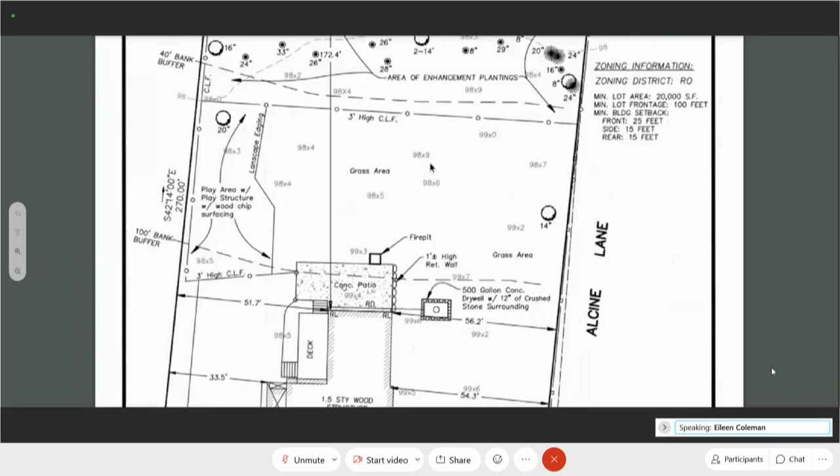Okay, do any of the commissioners have comments? Please identify yourself. All right, I have a couple of comments. One, I thought your project came out very well, sir, Mr. LaPont.

I'd like to express the appreciation of the commission for dealing with an issue that started with unapproved cutting of trees, and you worked with us very diligently and cooperatively. So I'd just like to thank you for that.

The last point I'd like to ask you, I don't believe this was in the order, but you have the old fence in back along the stream, and at some point that's convenient for you, I'd like to make a request, it's certainly not in the order or anything in the official papers, it's literally just a request. Would you be willing to remove the fence? The reason is that the area adjacent to the stream works cooperatively with the wildlife, and it would work better as a wildlife habitat if there wasn't a fence.

Yeah, we talked about that yesterday. I have no problem removing that. That would be fantastic, we appreciate that as well.

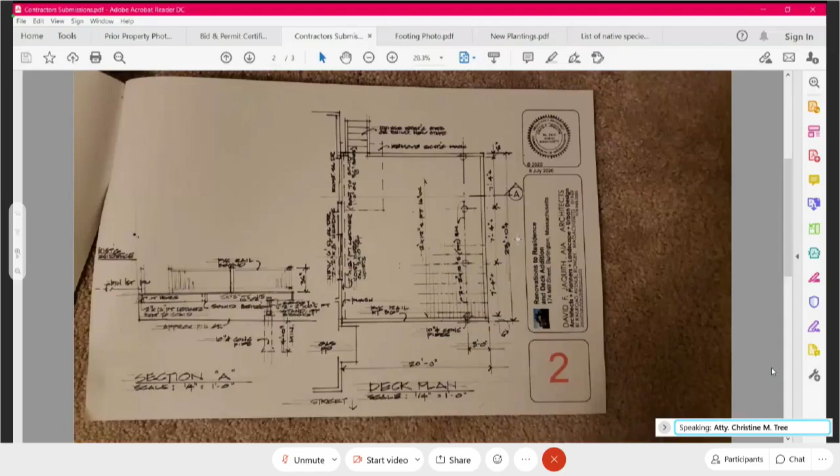After Ms. Coleman gave permission, he then submitted further plans to the building department, which asked for permission to build a 16 by 20 deck. You can see that on this plan, the dimensions here and here, and on this quality drawing he submitted. In fact, he was originally asked by the owners to build what I believe was a 14 by 20 deck, reported he got permission for the 16 by 20 deck, and ended up apparently building a 16 by 25 deck.

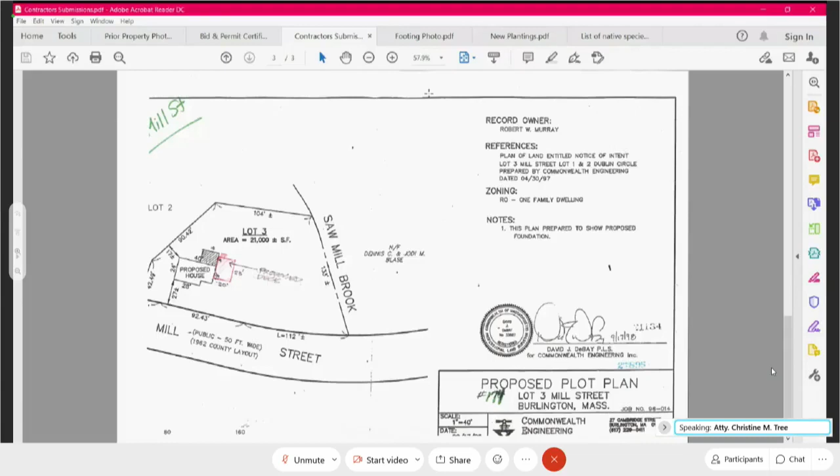This is a visual of the current state. As you can see, the extension of the full 16 comprises a lot of cantilevered territory on the deck, but the footings are, I think, riding over the line, and it gets worse as you get back to the rear of the property.

The Munns are at this point suffering a substantial number of problems from this contractor, the latest of which have culminated, as you've seen, in a police report. They have had to hire a new contractor. They were lucky enough to obtain the services of PAMCO, a Burlington-based contractor company, to help finish the project.

At this point we've seen that the markers are moved. Certainly they need to be replaced. The Munns are very happy to do that under the conditions that the Conservation Commission sets. We would ask that the deck not be required to be moved.

Among the other many expenses going on for the Munns, this would be another one, and the soil would suffer a lot of disturbance. The environment would suffer a lot of disturbance by the removal of those pilings at this point, particularly where the deck and the gravel around it are not an impervious structure.

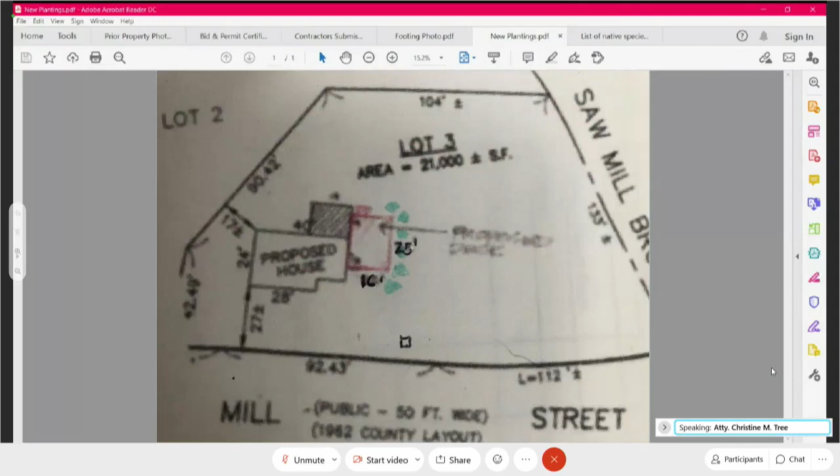As a measure of ameliorating the damage done by those pilings, the Munns would propose that some native shrubs be planted surrounding the deck—this is a little blurry, but in approximately a 25-foot line on the right-hand side, with another one here and here. This was submitted late, but this is a list, with some investigation, of some of those native shrubs. If any of these are particularly valuable to the Conservation Commission or deemed not appropriate, we'd appreciate the input.

I very much appreciate the Commission's consideration and appreciate any feedback that you have. I think that's everything.

Before we go back to the commission, I wasn't clear in explaining what the resource areas were. It's not just buffer zone to wetland—it's in the riverfront area as well.

Right, okay. And as an attorney, your last name is Tree? Is that it? It is. And just so the commission knows, I am Mrs. Munn's sister—I'm trying to help her out a little bit here. I do board work out in Western Mass before boards and municipal work, so I appreciate your listening to me. I know you don't have any idea who I am, so that's not an issue. I just was noting the irony of an attorney with the last name of Tree presenting to the Conservation Commission, which is great—I think that's fantastic.

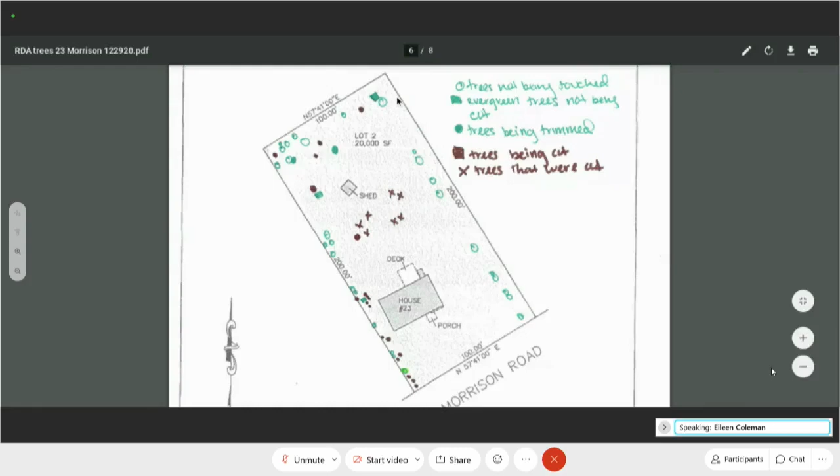I don't know if you can actually see my cursor that I'm waving around. So I think I'll stop there and pass it over to the commissioners.

Okay, Eileen, do you have a recommendation on certain trees that perhaps should not be removed, or do you want to see where the conversation goes? I think I want to see where the conversation goes with respect to the rest of the trees being removed.

We did draft a determination, and we are proposing that they do some replanting within 20 feet of the stream in compensation for the trees that either are cut or will be cut. And they should also move some piles of gravel that they've left right on the stream bank that need to be removed. All right, so that's your recommendation at the moment. Yeah, okay.

All right, Dawn, anything on this one? We had a look yesterday, willing to work with the folks, and I think that what they're asking sounds reasonable. All right, Gail.

So this is along riverfront. So we have regulations about no disturbance in riverfront, and it's important to maintain the vegetation in riverfront to help in terms of filtering runoff and also shading the stream, controlling temperature, and for lots of other reasons, maintaining the bank and reducing erosion. So it would have been nice if before any work was done the commission actually would have gone out there so that we could have identified which trees were appropriate to cut.

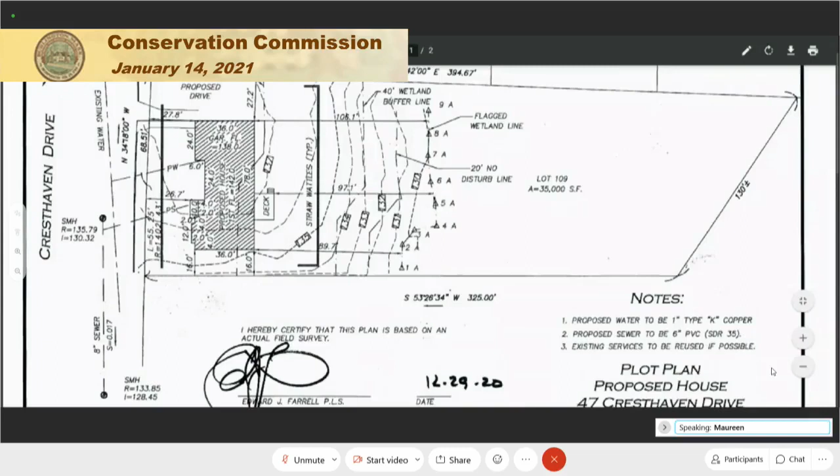Thank you, Eileen. I spoke to Eileen today, and there were concerns about some of the wetland flags. Unfortunately I wasn't able to get out to the site, but my boss, Steve Erickson, went out and reviewed the line. He thought some of these flags were torn down and found some remnants of blue ribbon. It's at the base of the slope, and he rehung some new flags out there so everyone's aware that that is a resource area and it's flagged. I can open it up to the commission for any questions.

All right, okay, thank you for your comments. Larry or Eileen, do you have comments to offer the commission?

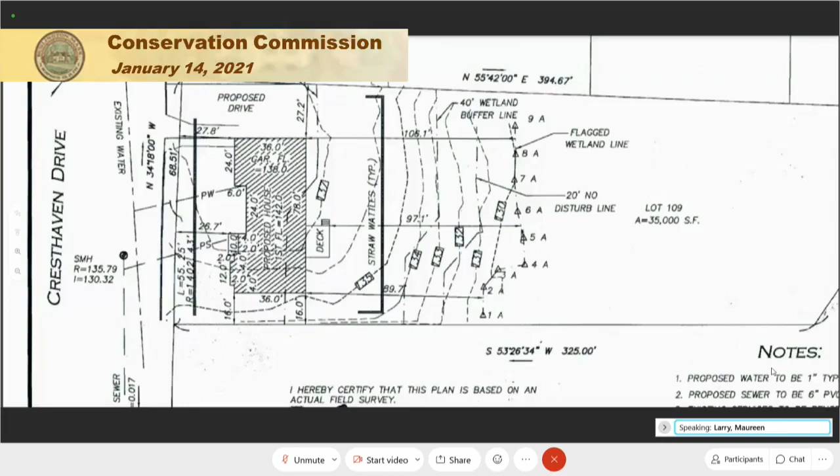Sorry, I was still muted. I was just going to say, when we were out with the commissioners yesterday, we did indeed see the flags along the wetland line. As Maureen said, it looked like either some were missing or moved. Steve definitely put some more out today, which I think are maybe along here. We could see there was a pool right in front of the wetland flags. Either way, the wetland line is at least 80 feet from where Rakesh is proposing to build a house, although there's bound to be some earthwork involved with getting the foundation in. There is a stream way back at the end of the property, I believe, but it's a very, very long property, so it's at least 300 feet away.

So the only pertinent resource area is the buffer zone to wetland, and I don't have any issues with this house going in as proposed.

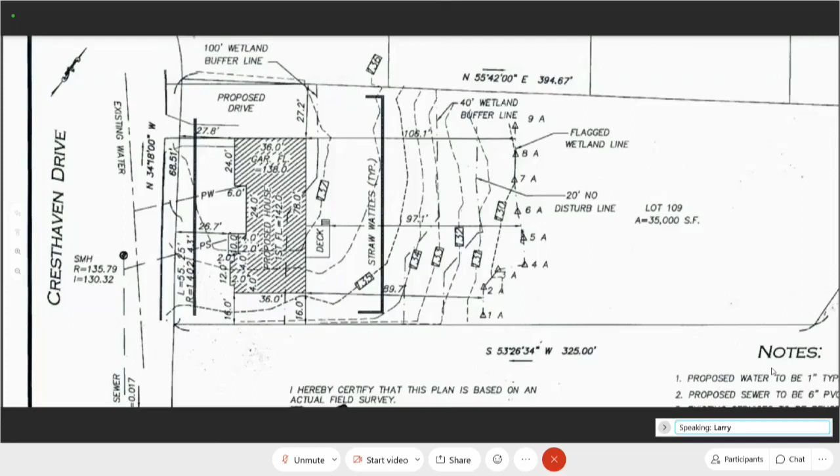Eileen, for the commission's benefit, in order to approve this project, do we need to find the wetland line, or can the project be approved without agreeing to the exact wetland line? We can approve it without agreeing to the exact wetland line. I think that's the way we've worked. All right, so it's easier, that way it becomes a non-issue.

Right, we got the exact placement of the flags. Is that okay with you, with the folks from the project? Yes, that works. Okay, all right.

Okay, so let's see if we have any further comment. Dawn, anything further? Nothing further. Gail, anything? No, I'm all set.

Bill? I think we should discuss having a fence along the 20-foot no disturb after the end of the project. Okay, all right.

Welcome to... comment on that. Okay. All right, Jennifer.

I would agree with Bill, but nothing else to add beyond that.

Ed? Just a small maintenance problem on the right-hand side, where the pool is. That right side of the pool got a lot of small debris. You should remove that so the actual pool will be its full size. Yeah, we can remove the debris.

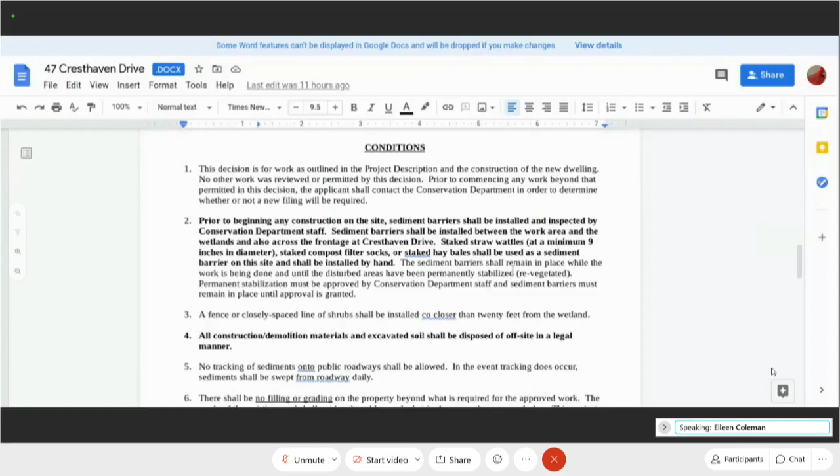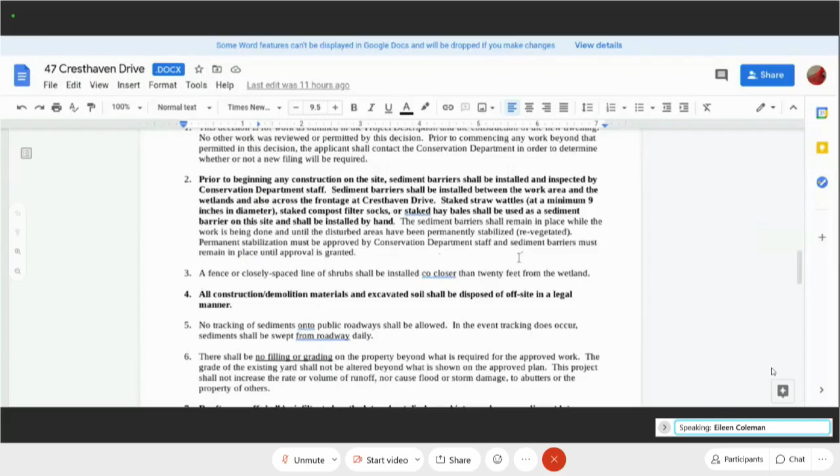Prior to beginning any construction on site, sediment barriers shall be installed and inspected by conservation staff between the work area and the wetlands and across the frontage at Cresthaven Drive. We reserve the right to require additional erosion controls should that be deemed necessary.

A fence or closely spaced line of shrubs shall be installed, no closer than 20 feet from the wetland. All construction or demolition materials and excavated soil should be disposed of off-site in a legal manner. No tracking of sediments onto the public roadway shall be allowed, and any sediment that is tracked must be swept daily.

There should be no filling or grading on the property beyond what is required for the approved work. The grade of the existing yard shall not be altered beyond what is shown in the approved plan and shall not increase the rate or volume of runoff, nor cause flood damage to the property of others.

Rooftop runoff shall be infiltrated on the lot and not discharged into the roadway or adjacent lots. Method of infiltration shall be approved by the Conservation Department. Dry wells or infiltrators shall be appropriately sized with supporting calculations.

If the driveway is to be replaced, the new driveway shall be pitched so that runoff from the driveway shall be directed to a stone infiltration trench or a trench drainage system or a grass swale, not to the street. Pesticides and herbicides shall not be used within 100 feet of the wetland.

Members of the Commission and their designated representatives have the right to enter upon and inspect the premises. Non-compliance with these conditions shall be deemed a violation of the Wetlands Protection Act and Burlington Bylaw Article 14. And the last condition is about what is required for a full occupancy permit.

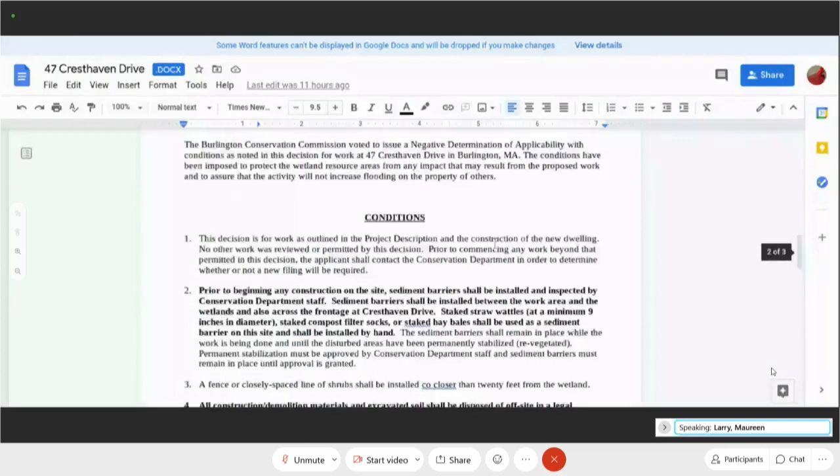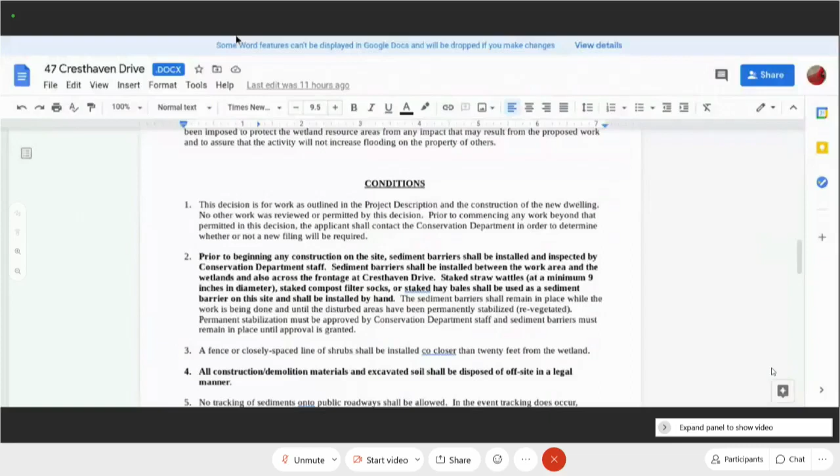Are there any questions? Do you folks from the project have any questions? You can always ask after the fact too. No. Okay, these are pretty standard conditions anyway. All right, so do the commissioners have any changes? Nope. No.

Hearing none, could I have a motion to issue a negative conditional determination for the project proposed at 47 Cresthaven Drive under Burlington Bylaw Article 14 and the State Wetlands Protection Act? So moved, this is Jennifer. Second, Ed. Dawn, how do you vote? Yes. Gail? Yes. Bill? Yes. Jennifer? Yes. Ed? Yes. Chair votes yes. The project, the request for determination passes by a vote of 6-0-0.

Great, all right. Thank folks, good luck with your project. Thank you. Thank you very much.

You're welcome. Next we have a public hearing, item number 7.

Notice is hereby given that the commission will hold a virtual public hearing during which time we'll take information related to a notice of intent. This has been filed by the town of Burlington, DPW. It is the construction of a sidewalk at Terrace Hall Ave. The proposed work would be within the bordering land subject to flooding, riverfront area, and the 100-foot buffer zone to bordering vegetative wetlands. It's being heard under the State Wetlands Protection Act and Burlington Bylaw Article 14. The commission will be reviewing this information and thereafter may issue an order of conditions for the proposed activities. This application can be viewed online by going to the commission webpage, or you can ask questions by submitting to conservation@burlington.org.

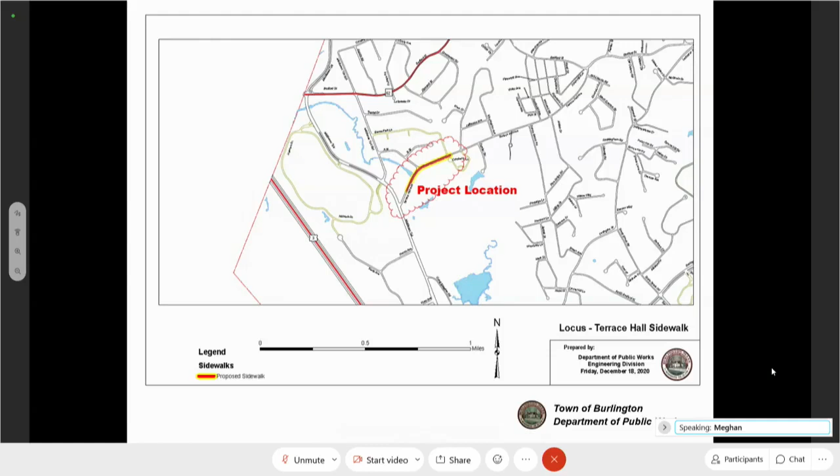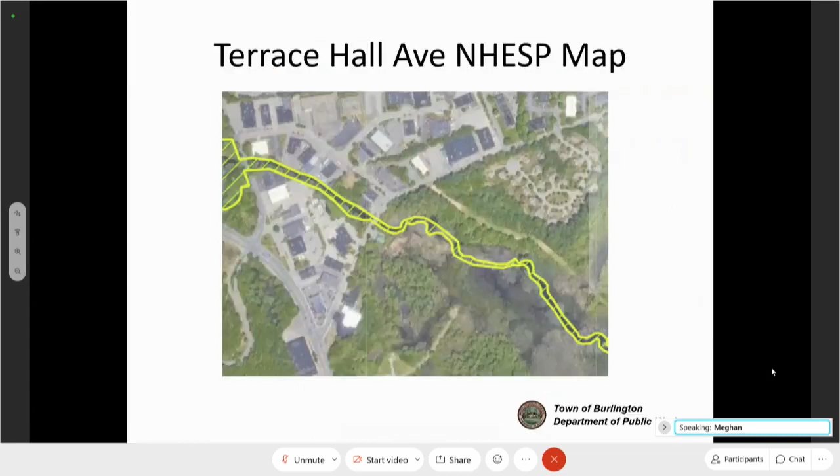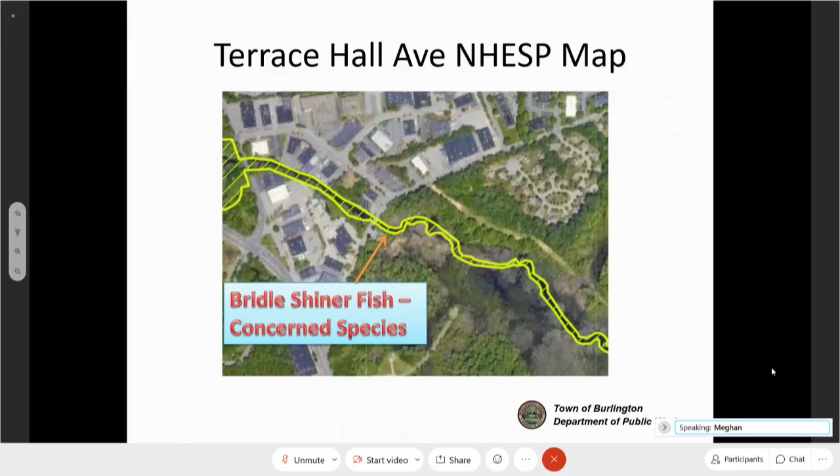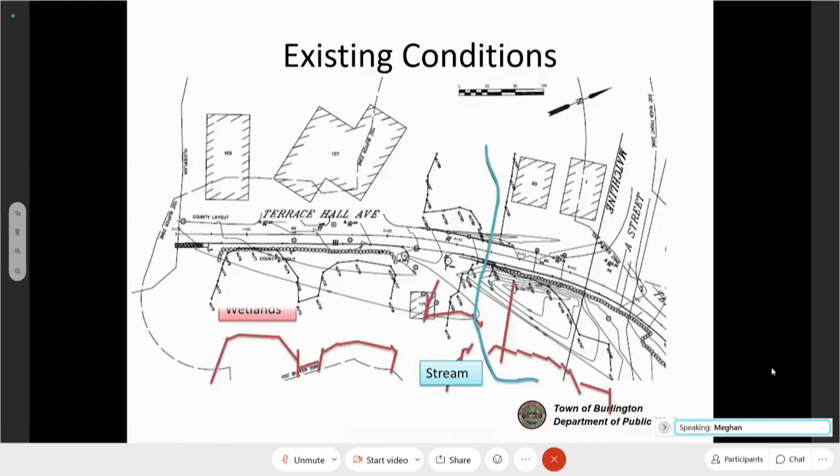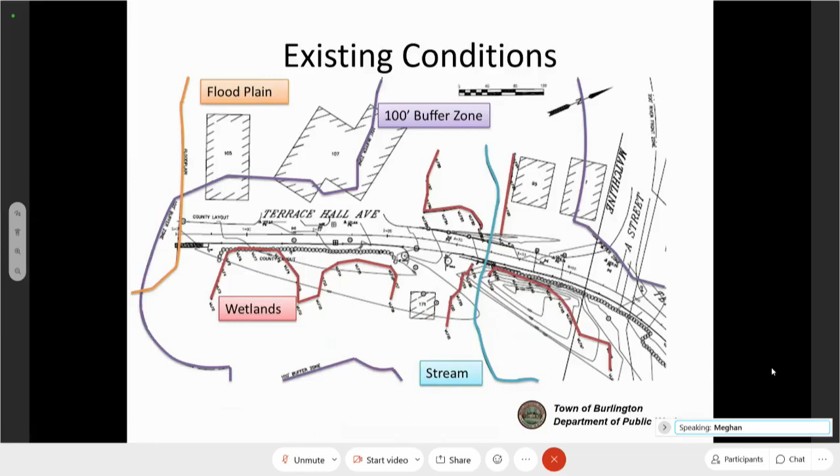So that is good because we won't actually be hurting their environment. So these are the existing conditions, and I'm just going to go over what's here because there is a lot that we're working within. So here's the stream, this is the wetlands, then we have the floodplain, the 100-foot buffer zone, and then this whole entire section is also within the 200-foot riverfront zone. And this is the other side of the project.

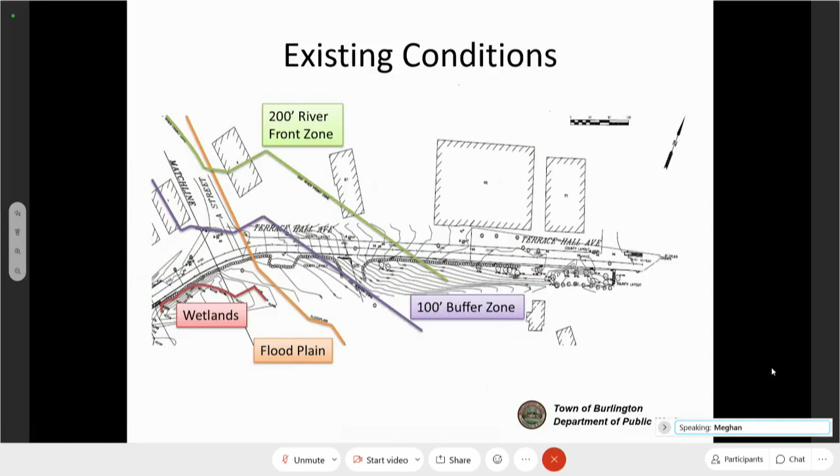It all didn't fit on one screen. So here's more of the wetlands, the floodplain, the buffer zone, and then the 200-foot riverfront zone. So we are working within a lot of it. A small section is not within that.

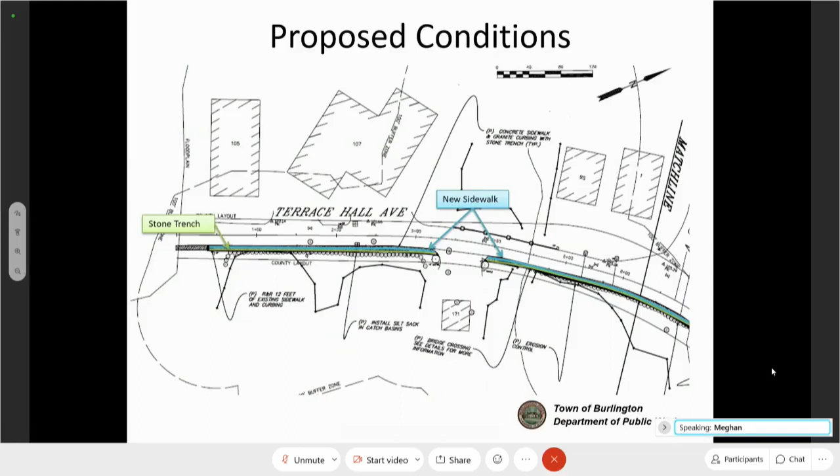So then our proposed conditions, we have the new sidewalk. Behind the sidewalk, we're going to have a stone trench that will be loam and seeded on top of it, and the sidewalk will be pitched towards it. That way, no runoff from the sidewalk will go to the street. It will all go and infiltrate through that stone trench. And then we're going to have erosion control behind the sidewalk when we're actually doing the work.

I know that it looks like we're working inside the wetlands. When I measured it out in the field, it doesn't look like we're actually going to be in the wetlands, like removing the wetlands resources, but it does look like that in the plans. The measurements didn't come out that way, but I am aware of where they are. They're all marked. So this sidewalk is being replaced, and we also have to cross over a bridge.

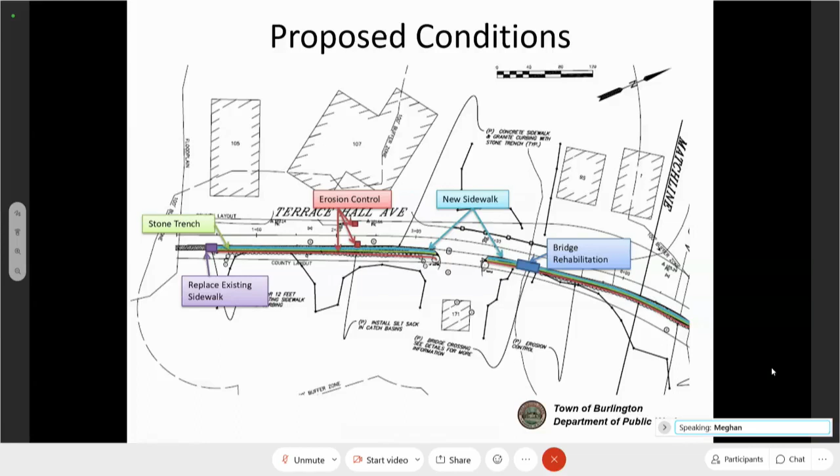So that bridge has a guardrail, and we're also going to be putting a chain link fence behind that guardrail to keep it safer for pedestrians crossing, because we do not want anyone to fall over.

It's a 30-foot oak. There is just no way that we can go around it within the county layout and safely. There'd be too much fill, and it wouldn't create a good enough sidewalk. Plus, with the utility pole, there's just no way going around it. But out of the entire project, that's the only large tree that we have to actually remove.

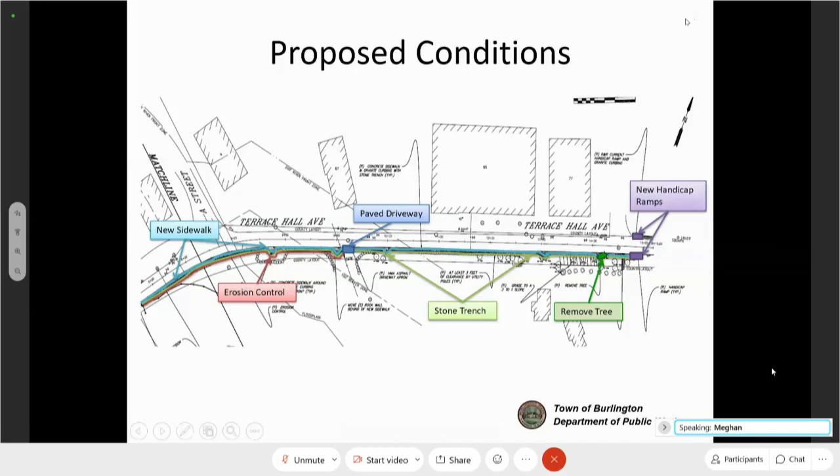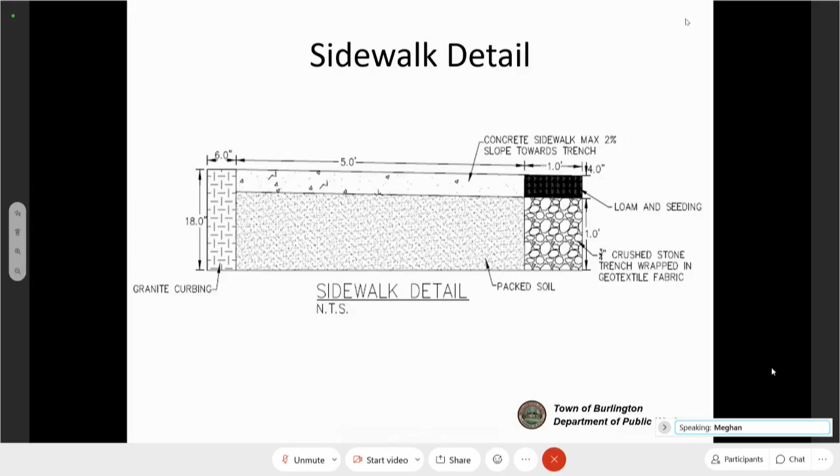And then it's going to be loam and seeded on top. The entire sidewalk is going to be done in concrete with granite curbing.

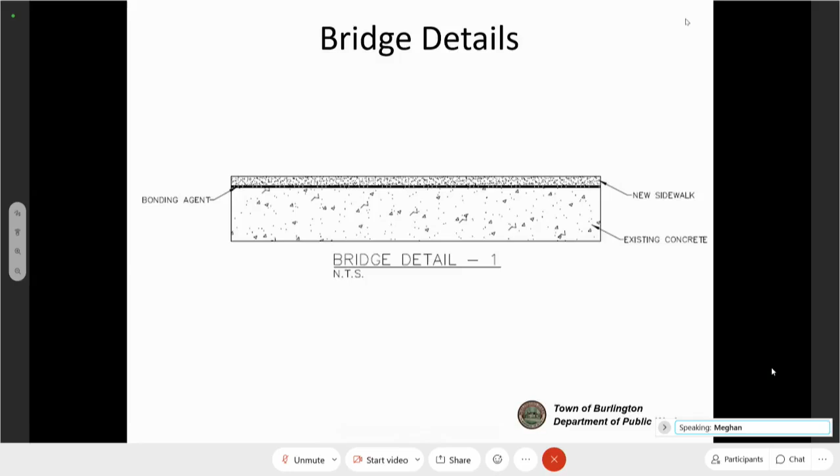This is the bridge. The bridge is existing concrete sidewalk as is. We're going to build on top of that to reinforce it with a bonding agent, and then new concrete poured on top.

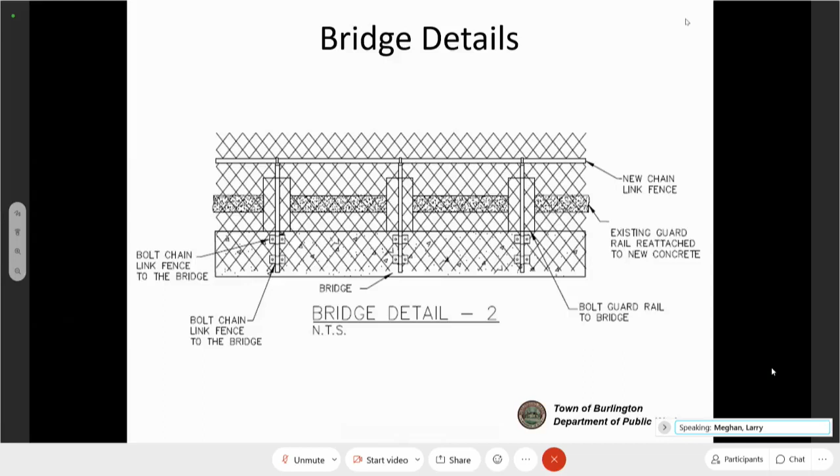As you can see, there's the guardrail, and a fence is going to be behind that guardrail just to prevent anybody from falling off or dropping something down it, and to keep anything from happening with that. Here's another example of that, where the guardrail is on top of the bridge and the chain link fence is behind it.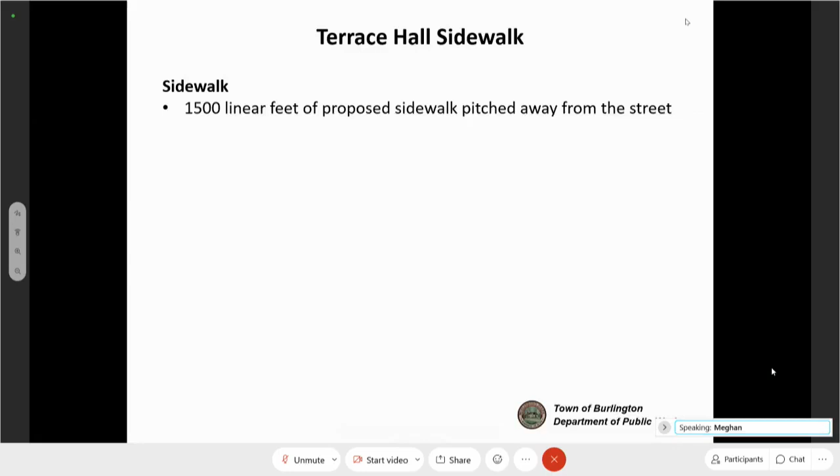For the bridge crossing, there's going to be a guardrail that's reinstalled. It's currently there. It's just going to be removed and put back in place once the new concrete is there. The chain link fence is going to be attached to the bridge, and anything that's old, corroded concrete will be power washed away and removed. And then there's going to be a bonding agent to connect the old and new concrete.

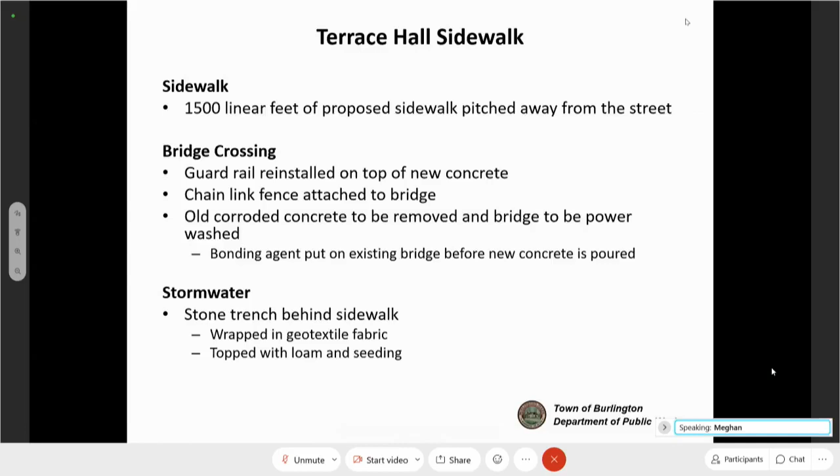And for stormwater, stone trench is going to be behind the sidewalk where it's pitched towards it. It's going to be wrapped in geotextile fabric to keep it working properly. And the whole thing is going to be topped with loam and seeding. It's not something that needs to be touched and redone every year. It'll work and be safe for everybody.

Right. Any questions? All right. Well, Meghan, that was a very good presentation, the way you did that, the logistics of it. Thank you. Very nicely done.

John and Eileen, would you like to add any additional comments? They've already summarized the resource areas involved and the way they did it. Sure. Yeah, I think Meghan did a good job of explaining the project and the resource areas. So I'll just quickly explain the regulatory aspects of it.

So you've got a lot of leeway both on stormwater requirements and on riverfront requirements for a project of this type, which is basically just a sidewalk or a footpath. The trench, I think, is more than enough for stormwater mitigation for the sidewalk, and the stormwater regulations allow you to allow something like that.

And as far as riverfront, there's bordering land subject to flooding. There's no impact, so there's no fill. So basically, there's no alteration of BLSF. There's obviously some impact to riverfront, but we did a site visit and tried to see if there was potentially any mitigation as far as plantings or whatever, but basically it's wooded right along up to the edge of the sidewalk, and there's not really any room for additional planting that I could see.

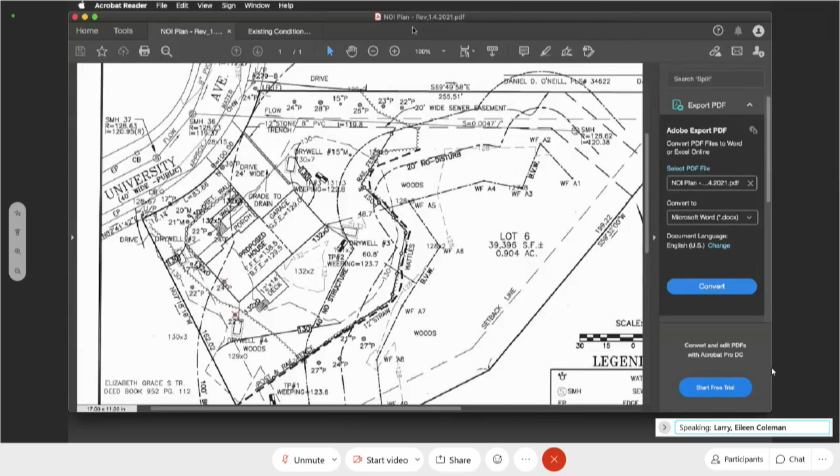I can. Jonathan, can you stop sharing your plan so that I can share mine? Thank you very much.

Does anybody hear that clicking? That's probably me and my mouse. Oh, okay. Was it? Sorry, my screen is being a bit slow. Just give me a few seconds to open the page. Okay. Uh-oh.

I'm circling. Okay, so you're saying you're going around in circles? I'm going to get John to share. I've got a little circle appearing. Oh no, I've got it here. I've got it here, a Chrome tab coming up. Okay, we'll start with the order. Sorry about the delay, it was just taking a long time to load. Okay, while this is happening, oh no, it says unable to reload the file.

While it's reloading, I'll try and read through what we have. So at the beginning are the plan references, which were the existing condition plans, the proposed condition plans, and the stormwater calculation summary.

The proposed condition plans was as reviewed. Oh my goodness, now you're seeing a blank screen, right? It was as described by Jonathan. This is still opening. John, maybe you... As you know, the first several conditions are pretty much boilerplate.

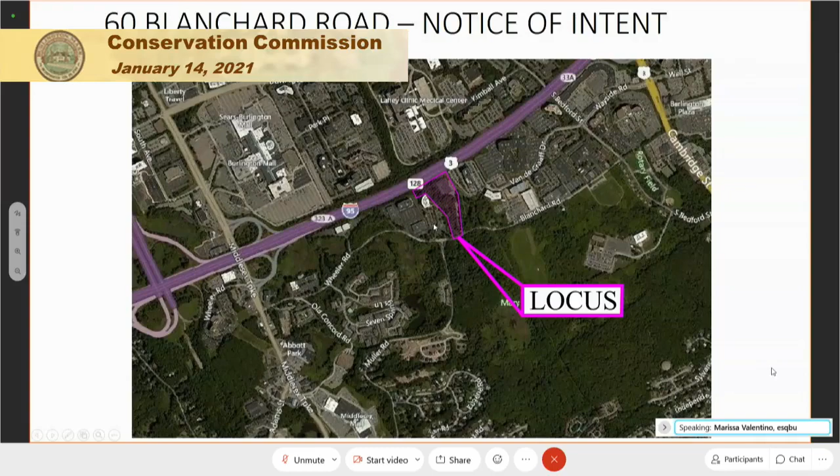I'm just going to share my screen. So as Bob mentioned, the site is located at 60 Blanchard Road - this is the site highlighted in purple. This is an aerial overview. The proposed use is clean rooms on demand at 60 Blanchard Road, which will involve interior improvements. This is another view of the site and the parking.

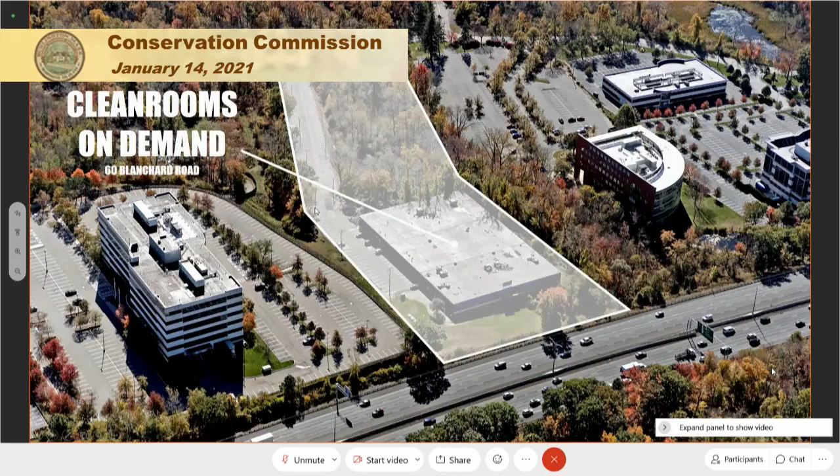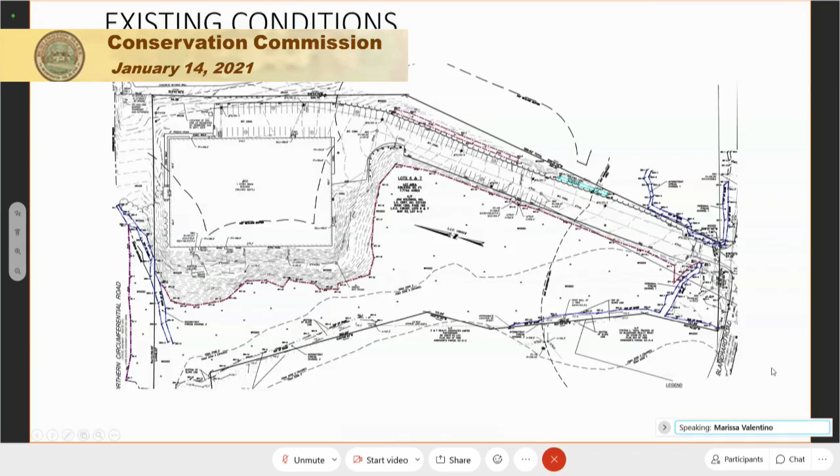So in the existing conditions, as mentioned previously, the existing building will remain. The parking lot is a long, linear parking lot with a long driveway. It is bound by bordering vegetated wetlands along a majority of the western side of the site, and there is some riverfront area adjacent to Blanchard Road.

So in the proposed conditions, this is the same building. The parking lot is replaced and curb is added to both sides - there was previously no curb. In addition, this area here is a cogeneration facility, and associated with this building there's approximately 1,200 square feet of new impervious area. We're able to mitigate for that by removing parking along the southern portion of the driveway.

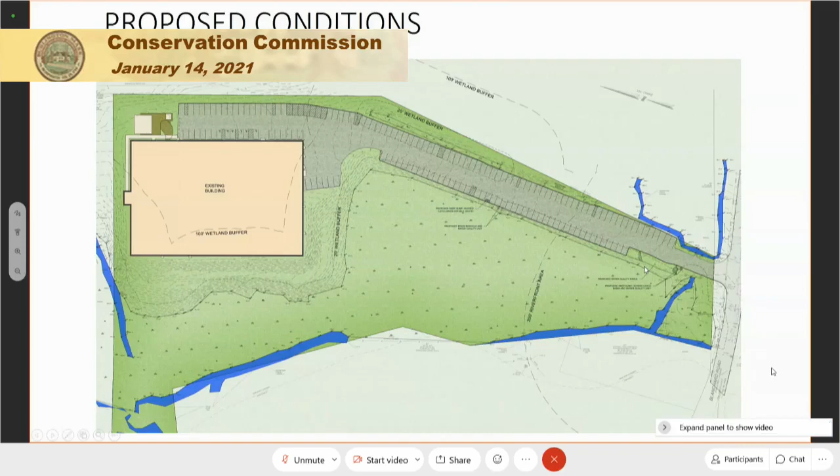For the stormwater improvement: there's an existing double catch basin about halfway down the driveway that is connected to an existing culvert that runs under the driveway. We are proposing to replace that double catch basin, which does not have a sump and is an older catch basin, with a drain manhole, and install a water quality unit and a double catch basin with a deep sump and hood upstream.

In addition, at the southern side of the site, we'll be installing a swale with a curb break. Any additional water that doesn't have a chance to infiltrate within this swale will be captured in the catch basin with a deep sump and hood and pass through a water quality unit and exit out to the wetlands. Both of these drainage improvements utilize the existing connections to the wetlands.

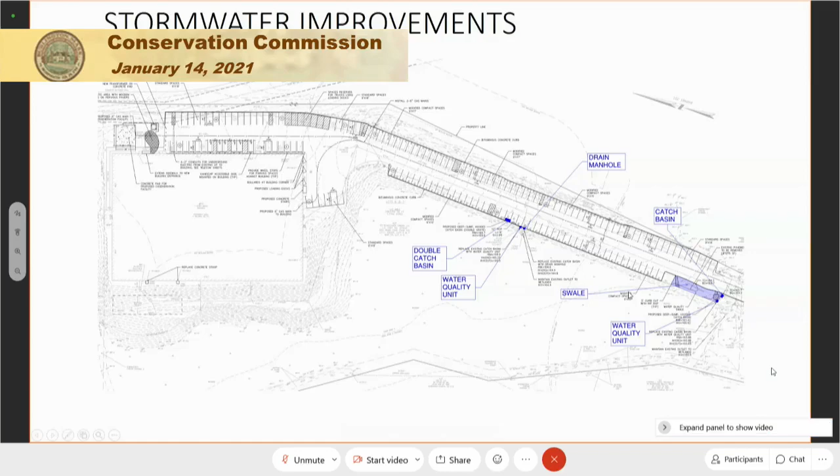And that is really the bulk of the improvements. There is also, I mentioned, the cogeneration facility, and there's also a new gas line associated with the project that will run up the driveway, but that will be within the paved areas. So with that, if there's any questions?

All right, very good. Thank you for the presentation. First, we'll call the flow of the rest of this hearing. We'll call on our staff, and then we will call on the commissioners and see if there's anyone in the audience. We'll make note of any questions that need, unless it's something really quick, probably a written response for the next meeting, if there is anything.

So either John or Eileen, do you have some comments on this project? Sure, I do. So Bob and Marissa gave a pretty good explanation of what this is all about. The commission consistently requires stormwater improvements when there's a parking lot reconstruction, a full depth reconstruction, which is what this was. They don't typically require a project to meet stormwater standards to the full extent, but certainly they're looking for improvements to the stormwater quality. So I think that this project does that between the two water quality units, and also, more importantly to me, the swale. That's the sort of improvement you're looking for when you get a parking lot reconstruction.

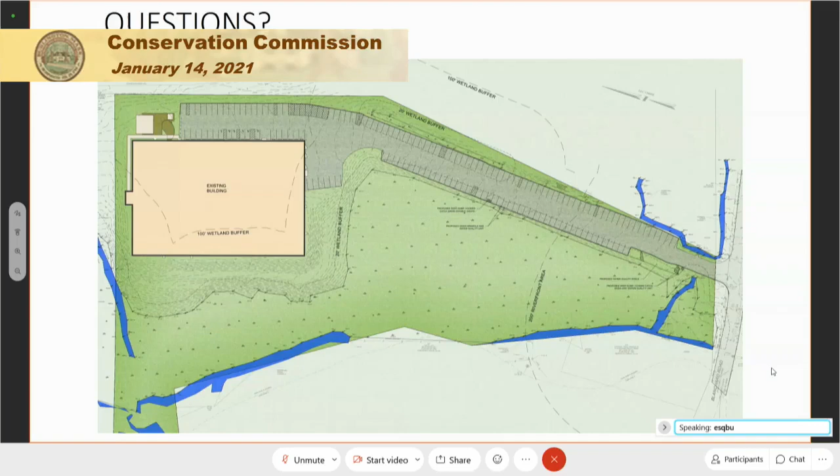All right. Should we go over the list of what I heard and you folks can add to it? Does that sound good, Mr. Buckley? I think that's a good suggestion. All right. The first thing is there's some vegetation cutting, but I think we're going to work with you folks and the commission, and we're going to put some conditions in that deals with that. So I'm not sure anything further is needed from that down at the lower end there, where the vegetation cutting was. I'm just adding it to the list of something that needs to be dealt with.

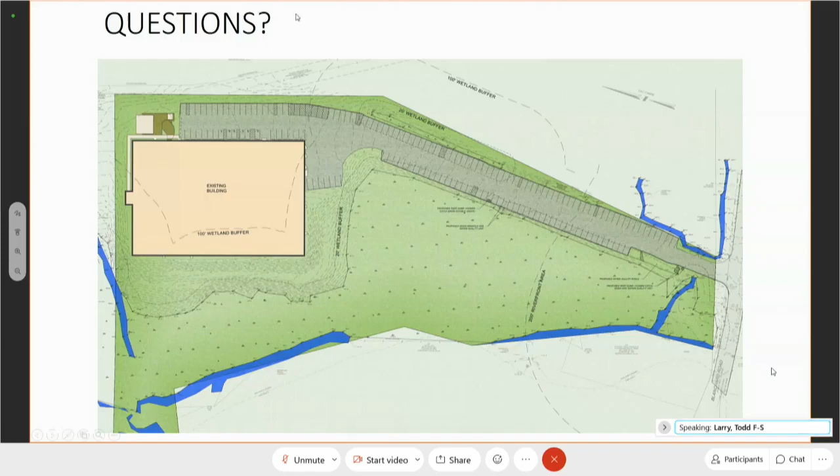Then there's, let's see, we talked about the curb cut. You're going to put that on spot grades. You're going to put it on the plan to make sure you get the driveway graded the way it should be.

And we talked about the curb. That bituminous curb is notorious for breaking down pretty quickly after the first few snow plows.

I guess we're looking for the appropriate location. Let me get this straight, is it the westerly side of the driveway? Yeah, everything kind of drains from north to south and also from east to west, towards the larger wetland area on site. So in our opinion, it would make the most sense to put it along the western edge.

John, do you agree with that, or you want to think about it, or Eileen? So the problem is we don't want curbing in the wetlands. If it's on the eastern edge, and if the bituminous on the eastern edge gets plowed into the wetlands, the water may not flow into the wetlands, but the bituminous curbing still ends up in the wetlands. So we're aware of your recommendation of an alternative material, so we'll take a look at that.

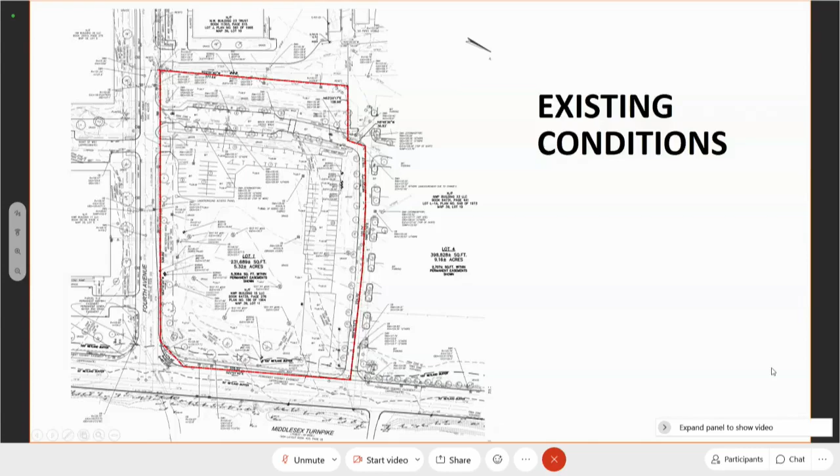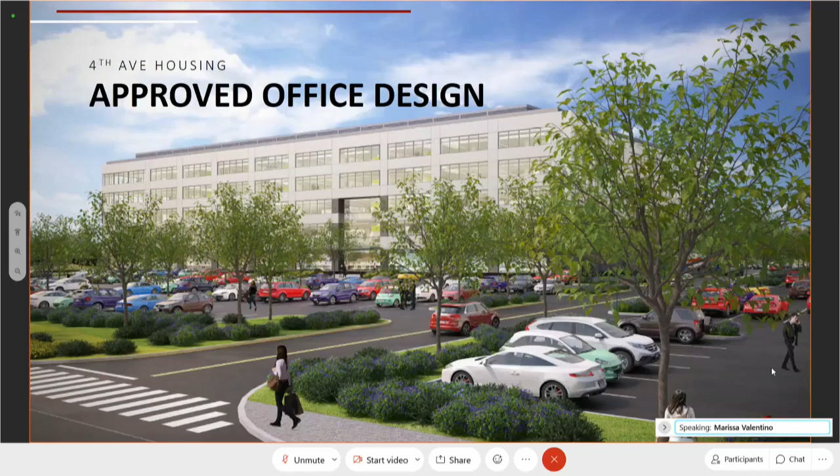So the site was previously before you in 2016. This view just shows the previously approved office building, from Middlesex Turnpike. On this graphical depiction, it's showing the proposed residential building in red with the proposed office building in black, just so you can get a good idea of how this project relates to the previously approved project.

Pretty similar layout. This project actually increases the buffer a little bit along Middlesex Turnpike and also includes a small retail building.

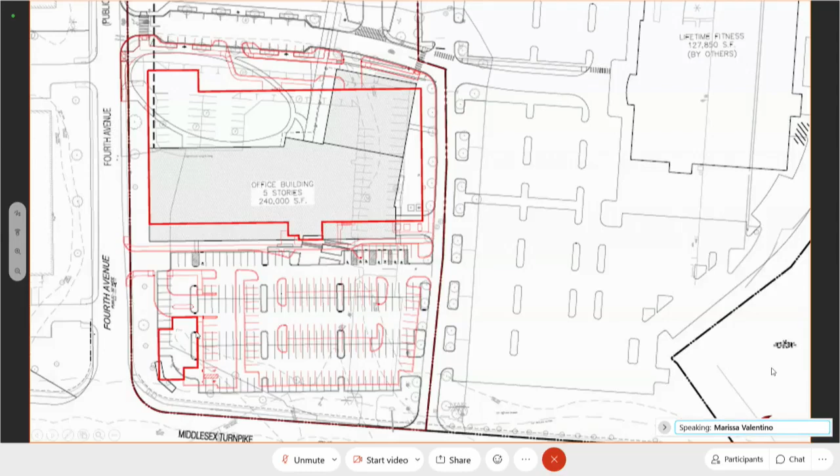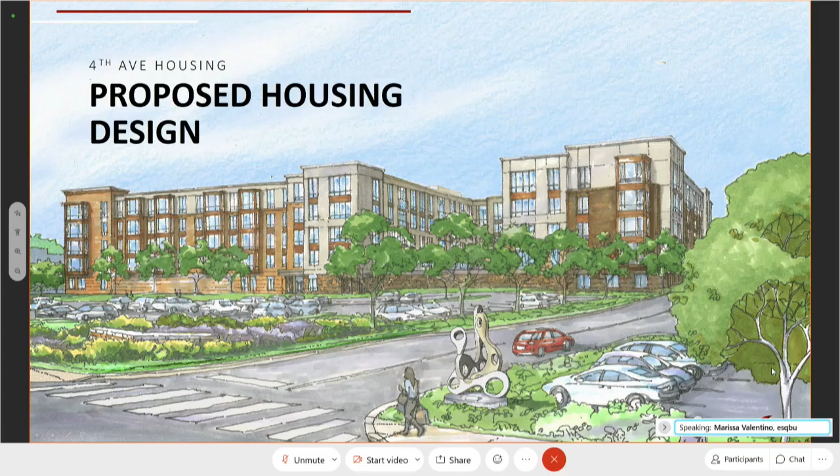Here's a rendering of the proposed housing design, from the same view from Middlesex Turnpike as that previous slide. And this is looking at 4th Ave. So what you're seeing is the small 1.5-story retail building at the corner of 4th Ave and Middlesex Turnpike, and some existing trees that we're hoping to save as part of the project.

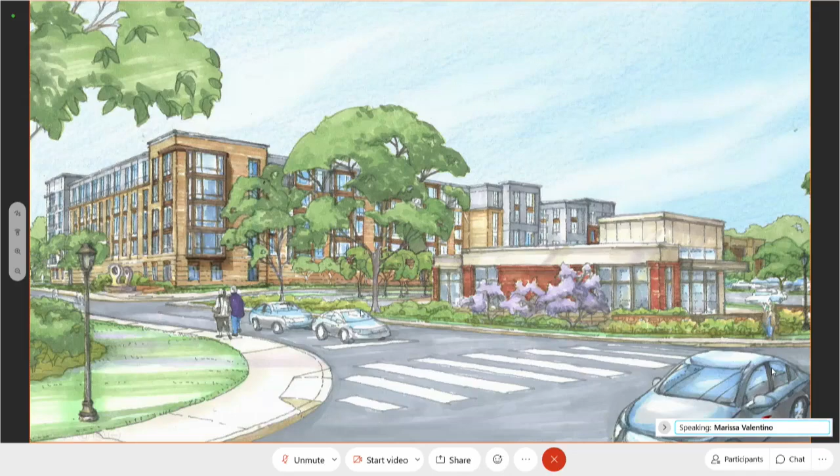Here's a view of that access drive that was constructed as part of Lifetime Fitness. As you can see, in the center of the screen is looking at Lifetime. The proposed residential building is on the right side, and a potential future building is on the left. That is not part of this project, it's just for planning purposes.

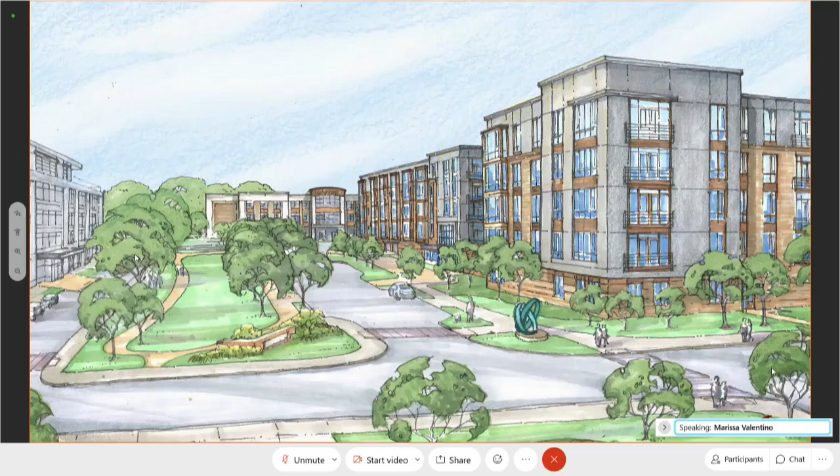Marissa, can I just interrupt for a second? Could you go back to that? Yeah.

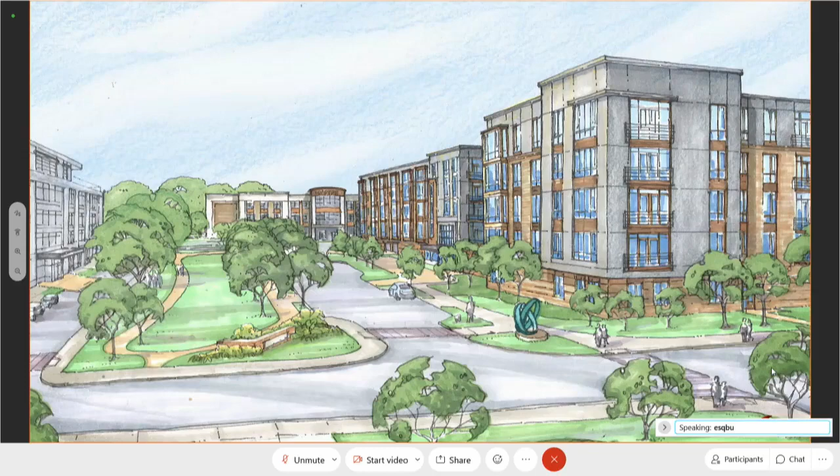One of the things the commission is very excited about with this project is the expansive green being constructed right outside of the entrance. The intent is keeping things internal through the site, off the main drag, Middlesex Turnpike, but internal. It will be an activated internal green that the other building will also front on, so it creates a sense of place. Todd Fremont Smith was very excited about it, and I am too. Thank you.

Here's another view of the landscape site plan showing that green area Bob was just mentioning. This is still under design, but the intent is to keep it a green space and open to the public.

The residential building is approximately 250,000 square feet. The ground level has parking. The building has 2 courtyard areas, shown here and here. There's a 3,500 plus or minus square foot retail building located at the corner of 4th Ave and Middlesex Turnpike, and there's enhanced landscaping throughout the site.

These larger trees are existing trees that we're hoping to save as part of the project. The landscape buffer along Middlesex Turnpike was designed to be a similar treatment to Bancroft. It's actually a little bit wider, so we might have some more plantings incorporated, and it will include planting, screening, and decorative walls.

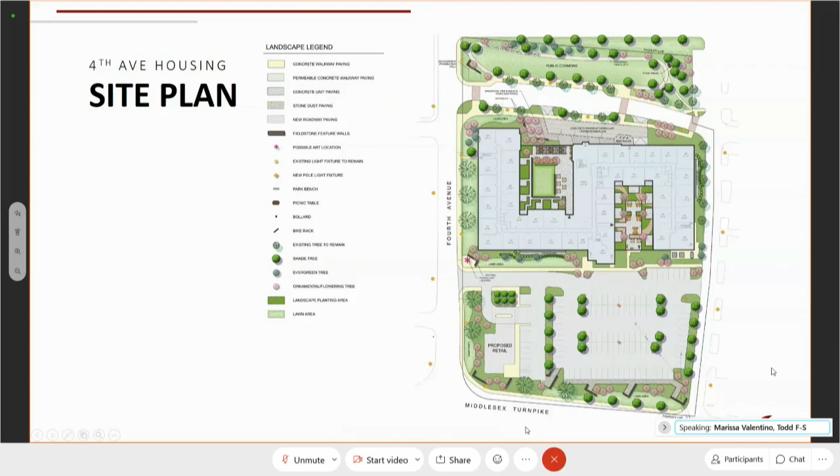Now to segue back to the floodplain. As I mentioned before, the site has bordering land subject to flooding, located approximately here. Potential floods would come from the north across Route 3 and move south. This flood has multiple elevations, shown as these little squiggly lines on the FEMA map, as the grade drops from north to south.

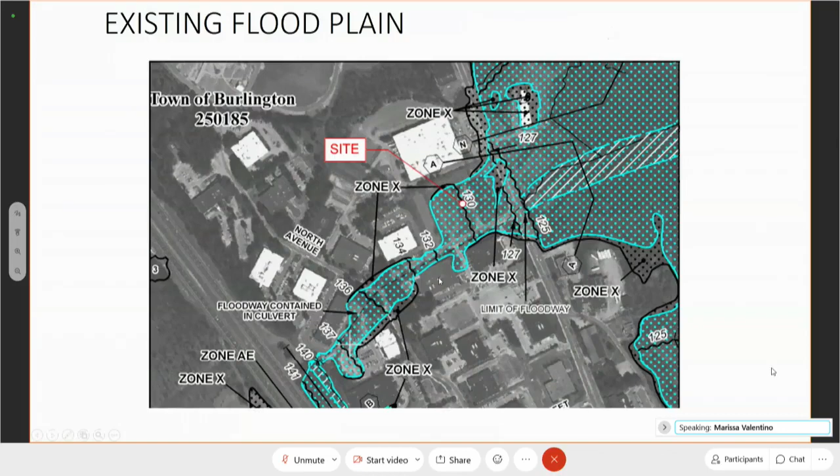This is an overlay of the survey of the site that depicts the existing floodplain areas based on the actual on-site elevations. This larger white portion that you're noticing that is not included in the floodplain areas is where the former building was, so it's set above the floodplain - that's why it's not included. The floodplain elevations are 131 on the northern side and taper down all the way to 127 at Middlesex Turnpike.

This is the lobby area, this is an entrance, and this is utilities and stairwell. The intent is to slope the garage slab from this line right here from north to south. This will allow the floodwaters to enter the building. There'll be grates along the sides, so the floodwaters will be able to freely enter the building and then recede slowly as floodwaters naturally do. It's intended to mimic the existing potential floods that are out there.

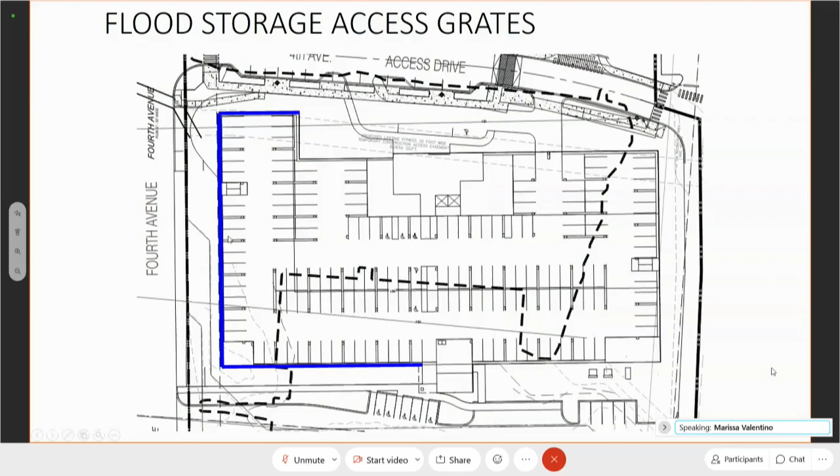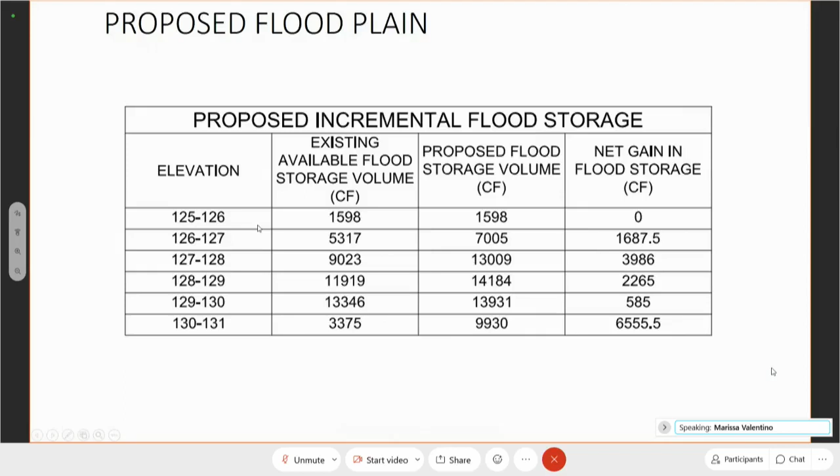Here's a chart just showing the incremental flood storage. As you can see, we're increasing it at every elevation, except for 125 to 126, and that's because that area is remaining untouched on the site. We are not touching that area.

All paved areas will be captured in catch basins with deep sumps and hoods, passed through water quality units. The eastern side of the site, paved areas would enter the subsurface detention system, along with about a third of this garage roof and then the retail building. The subsurface detention system would store the water and let it out slowly into the existing municipal drainage system. Due to high groundwater on the site, infiltration is really not feasible, so this will be a precast concrete structure.

There is a requirement to recharge 10% above existing as part of the PDD. As you recall, as part of the 3rd Avenue infiltration system, an excess of recharge was provided at that project. So we're able to meet the recharge requirement by using a portion of that recharge that was constructed as part of 3rd Avenue. For utilities, there'll be upgraded sewer, water, and electric on site.

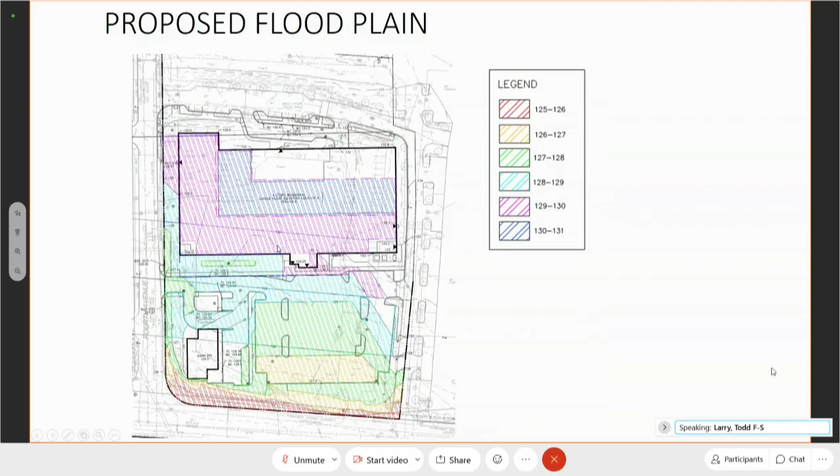Okay, and could you explain how on the existing site the stormwater is being discharged? In other words, are you changing the very nature of how the stormwater is being discharged compared to the existing site?

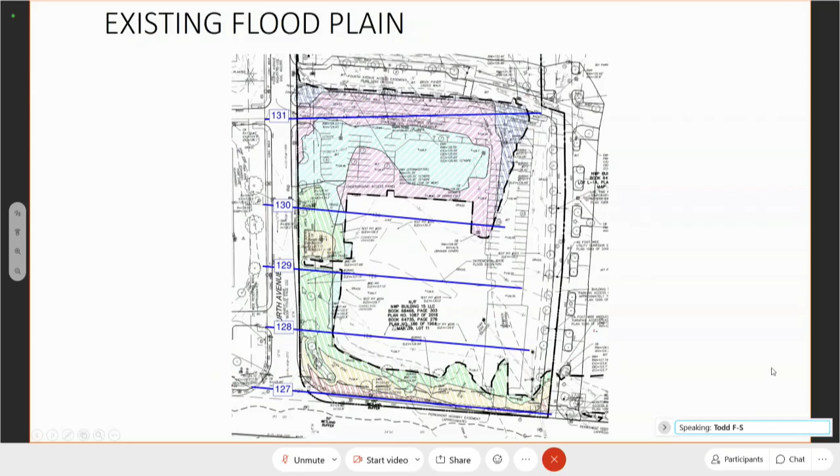So you're not fundamentally changing the nature of where the water discharges? Correct. Okay, good, that's the answer. Thank you.

The last question - I have to ask you a question first before I ask the real question. Are you making some type of connection to Lifetime Fitness as an amenity to the people that live here? Yes, we're working with Lifetime.

We gave a much more detailed explanation at the planning board hearing last week, but Lifetime has a concept called Lifetime Living that they're rolling out across the country, and they're partnering with us here on this site. So this will be a Lifetime Living multifamily residential development that we will co-manage, and Nordblom will be a joint venture partner and stay in this long term. Every apartment in this building will get automatically one free pass to Lifetime Fitness next door. So we're just trying to create a wellness neighborhood in this corner of the park.

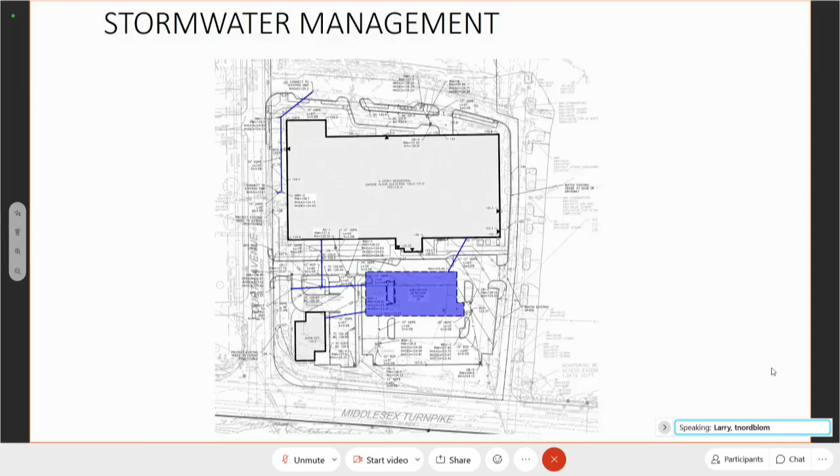I was thinking about the walkway you mentioned between Lifetime Fitness and this residential area. Even with some vegetation on both sides, it's better than walking along Middlesex Turnpike. Yes, I agree. So it's kind of a challenge, but it would certainly be a nice addition if you could do it.

I know there's a pathway that leads from this site to the front door of Lifetime Fitness that has vegetation on both sides. We can study it. That would be great if you could see if there's anything further you could do in that regard.

Not for this meeting, but at some point I'd like to contact you about the other side of that trail from the north that heads to Route 3. Yes, I've been on it many times, and one major improvement that wouldn't take a lot of effort is dealing with all the tires people have deposited there — about 40 tires that ruin the whole feel of walking on the path.

We don't have to talk about it here since it's not relevant, but I'd love to send you an email soon and ask if we could do something about it over the next few months. Sure, we'd be happy to look at that. We're constantly pulling stuff out of there — people dump things in the woods. But that's something we could definitely work with you on.

I've counted 38 tires right now that have been deposited, and I know exactly where they are if you need to know. Well, maybe the best thing to do is just take a walk up there someday. That sounds great, Todd.